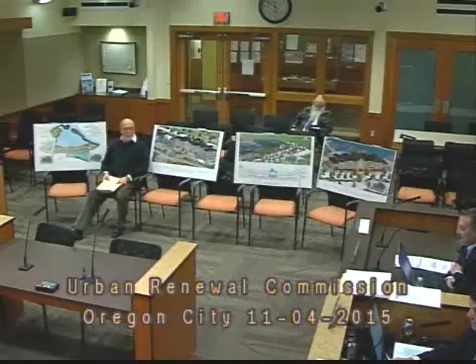Thank you, Mr. Chair, Commissioners. A request has been made by Clackamas Cove LLC to add Lot 5 to Phase 2 of the Cove development, to change its proposed use from office to mixed use. That would include 2 restaurants, a leasing office, and a public plaza area. The change is desired; it was expressed that the change needs to be made due to current market conditions and to comply with the parking requirements for build out of Phase 2.

It's also expected to improve the financial feasibility of the project and enhance its overall economic impact. You do have a detailed memo request from Clackamas Cove LLC, and they are here tonight to answer any questions you might have. If the Commission does agree with this change, then staff would proceed in developing an amendment to add to the DDA.

I do have a question. Is the design on the third board there different than the one that we've seen before? Have you redesigned the building to accommodate this change?

My name is Ed Darrow, the developer on the Cove, representing CCLLC, and this is a different elevation. We have a total of 7 buildings, and they alternate. Every other building is a different elevation, different roof style, and different colors, which is kind of part of the mandate under the code.

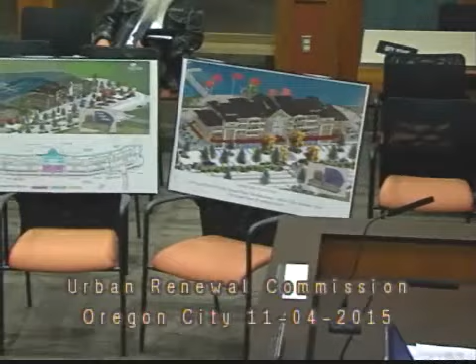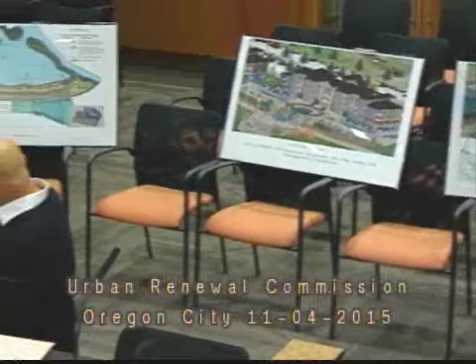So this building here, which is in the center, that's Lot 5. And if you look at the overall site plan back here, it would be right in the very center. So we go with one type, we alternate all the way across for a total of 7 buildings. Okay.

I got a couple questions. Yeah, go ahead. So for Lot 5, this new proposal, you have a restaurant on both sides now, right? Yes. And then some office, and then you still have residence up above. Yes. And then if I looked at the drawings right, you have a ramp that goes to a garage for the residents. Yes. So how did I couldn't find out where that ramp goes into the building, where it doesn't disturb the outdoor seating for the restaurants.

The ramp goes, it's right there. Okay. And on the overall site plan, it comes right down here to the left side. But how does it get into the actual building? It drops down. We're at 12 feet high. It goes down at approximately 8% grade and dives into the parking structure, which is totally below.

So the right entrance here is underneath the outdoor seating then? Yes, yes. Okay, so it curves underneath that. Okay, and then where is the exit? Just on the other side? No, it turns around and comes back up. So that's a two-way. It is. Okay, two-way.

And so the parking along the street side would be for the offices and the restaurants. Totally, and that was one of the big conflicts in the design element, was where can we get the parking to accommodate the restaurants. We actually increased the size of the restaurants from 1,625 square feet up to 3,200 each. Felt like it would be a better accommodation, especially given the outdoor amenity, which is this back area.

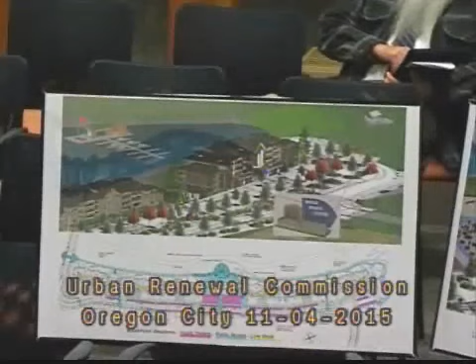Their lease 6 years ago was going to be a 90-year lease. 5 years ago it was going to be a 60. Now they're saying it'll be 15 to 20. I can't finance that.

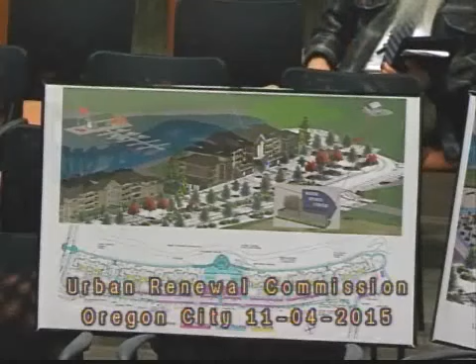So we said, all right, let's figure out the best economic deal we can do. If I take this center spot and build an office project, it takes about 450 square feet per parking space for subterranean parking. We've got 43,560 square feet, which is 1 acre - that's all that site is in the very center. That represents maybe 90 to 95 parking spaces if it was just crunched in there.

At 4 to 1, a minimum parking space, we could get 24,000 square feet of office. That's about $2.5 million less than if we did the residential, the office, and the restaurants. So the economic base really supports the modification.

The other thing I don't like about where we were is, if I'm going to get stuck with a vacant lot in the middle of a spectacular project, that's not fun. I want to build the whole thing out, and one of the things I've been talking with Eric and with Tony is how do we finish up the rest of Main Street.

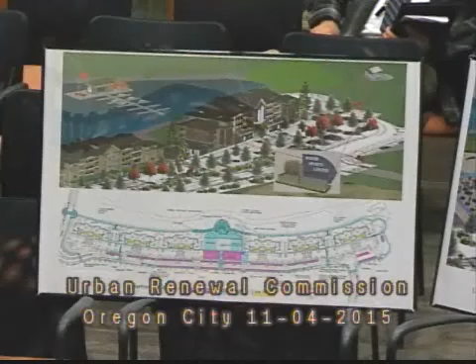Which is at the very top side of Lot 2, right here, that's what they're completing. That leaves this uncompleted. I don't like it. I'm sure you guys don't like it either. You want to have a finished project.

The thing you create when you do a project of this size is the window. What's the window? When you drive in, does it feel right? Does it feel good? I'd like to see this completed.

We are currently working with an entity to do a hotel on that site, which would be great. We've done the design work for them, we've done everything. So that's an outside possibility, and I'd like to bring that to the table as fast as we could, because I want to get that road completed.

The other thing I had requested of staff is, is there a way that we could share in some way to build that out? You put up part of the money, we'll put up part of the money. I'd like to see it done, get it completed. It's about $750,000 - it's not a cheap thing to do.

Hang on - don't we own the shopping center side of that property along Main Street? Yes, the Main Street extension. Both sides, yes. It's 1.2 acres, which is this little piece right here. That is not being used for anything other than entry monumenting. So when you come into the project, you say, what's here? Where are you going?

And then there was a request by Neely to put in the parking there for the trailhead. With this concept, we're talking about putting in the parking right here for the trailhead, which would give you 2 access points - one would be a ramp going down the side, the other is for the handicap.

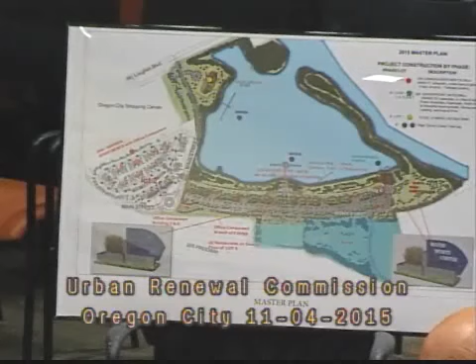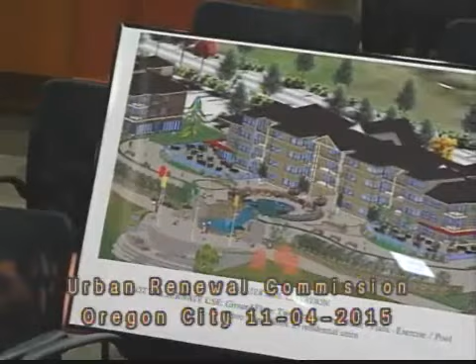If we build the parking structure for the units on top, there'll be an elevator that could take them to the garage. From the garage, they go right out to the Esplanade. So it works in so many ways in terms of being a public space. If you look at the blue here, all of that is public access. Pink is parking, and the yellow is the live-work units, which are right across here. So we've got a nice mix of uses.

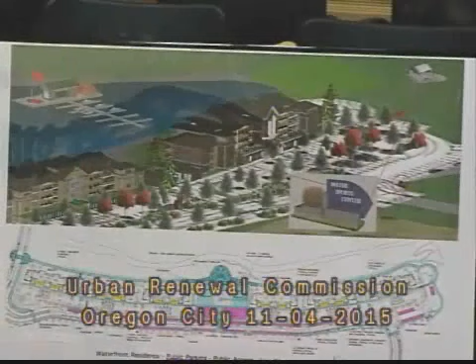We've got 8,700 square feet of the live-work, and then in here we have 7,000 square feet of office, and then restaurant, and then we also have a leasing office and an exercise area there.

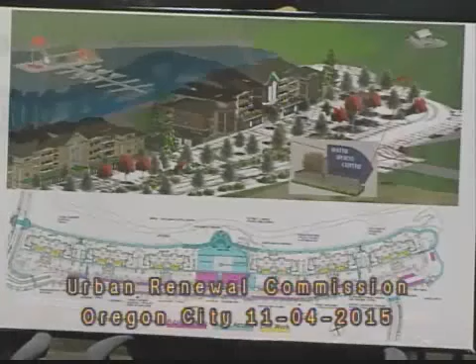So the thing that's nice about it is the back, which I think is really cool, is that we have this whole space that becomes public space. Before, in the design, where we had parking that would work, given if we had to deal with Tri-City, we had 2 office buildings here at 40,000 each - they took up the whole space. I mean, that would be great if you could fill it up, and it would be a nice economic benefit. But given that that's not there, my thought, working with our consultants, was let's turn it into a public space and make it an exciting, really cool thing.

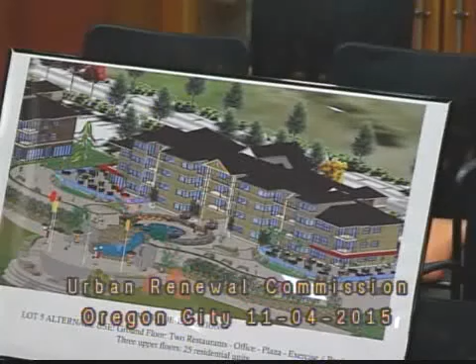So this area really is public access, even though there's a pool here. Some people like to go out and see who's at the pool, if you're in the public. Is that an actual swimming pool? I think it's just water.

That's a swimming pool or a water feature. Right here is a swimming pool, and it's not connected in terms of the actual water, but the water will flow out so that it looks like it's coming out of the pool. So it becomes an infinity water feature down here.

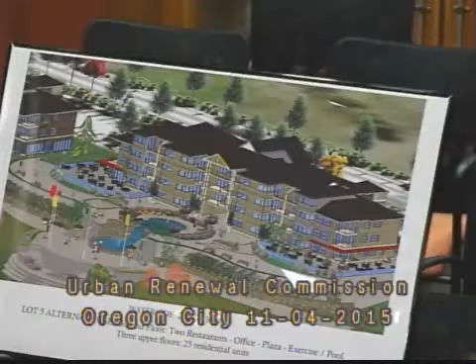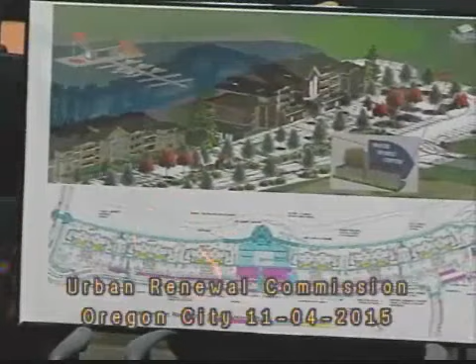At the Esplanade, if you recall, across the frontage here, for 100 feet on this side and 100 feet on this side, it's 20 feet wide. The rest of it is 10. You can actually bring out antique boats, have a Saturday market, have some pretty exciting things. That was one of our original intentions, but now we have the ability to do it out here, also on this plaza.

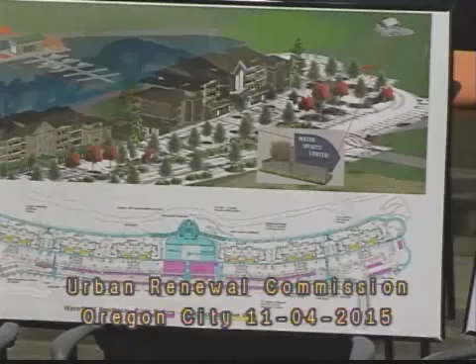The amphitheater, is that still there? It's like right over here. It reminds me a little bit of Seaside, how you have the stairs down, the public access. I think that's great.

How you've adjusted your plans to market changes, I think is really good. I think it's really smart. And I do think this is a good use of the space. It has probably one of the best views, so for the restaurants to have the views and also a public plaza, I think it's great. I think it's a good change as well because after people go home from work, it's the apartments, right? It's kind of like a mini community, and they need a place to go after work and on weekends, and I think it fits a little bit better for that area.

We have done probably 3 projects where you have 400 to 500 units at one time. That's a lot of units. It is a unique marketing approach.

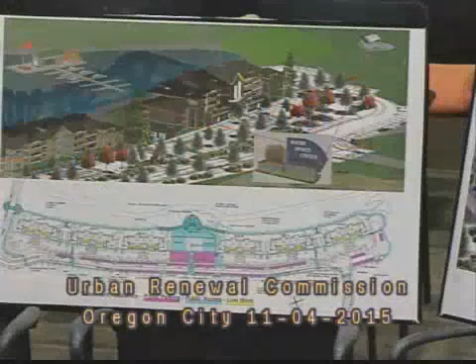And what I really like about this new concept that's exciting to me is that the public can come out here and come down to Oregon City.

It brings up one of the ancillary issues that is very upsetting to me, the quality of the water and not having the dredging done. I've talked with both Eric and Tony about that. We have to get that done. I'm predicating a major investment, and the water doesn't work. It's a big deal. I went out there last week and walked it with Jerry Herman. We went through the whole waterway and what could be done. We have a dredging permit. We've got to write a check and get it done. It needs to be cleaned up. So that's something the commission needs to consider.

Originally, we had the office setting there, and I was really kind of encouraged with this project because it was jobs. But I'm kind of over that now, because I can really see this is going to be a successful project for Oregon City, just minus the jobs part of it. And I like the idea that it's kind of a live, work, play atmosphere there.

That campaign's over, Brian. Yeah, I know. Did I bring my sign?